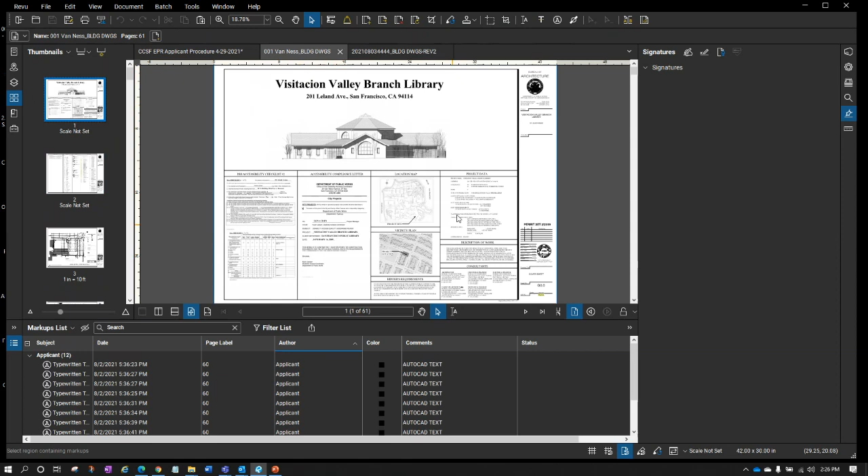So when I look at my sheet here, a couple things pop out at me right away. Number one, you can see at the bottom there's already a whole bunch of markups here - we're going to get rid of those. It's important that we have blank areas in place for the stamps; we'll talk about that. We want, if I look at my proper set of drawings, nice labels for our pages, and we want bookmarks identified for our pages. And of course with layers, we don't want to see any layers, and we don't want to see any markups at the bottom. So all of this we're going to go through step by step, and we're really going to start to get into this now.

One last thing I want to talk about, because this is always a common question we get, has to do with the versions of Bluebeam - the licensed versus unlicensed versions. So before I even get into all these procedural components we identify in the table of contents for the preparation of documents, I want to point out one more appendix - Appendix 2, right here at the bottom. In Appendix 2, we include information about the different versions of Bluebeam and how they're used. Let's cover that first, because it's a really big, important topic a lot of people will ask about.

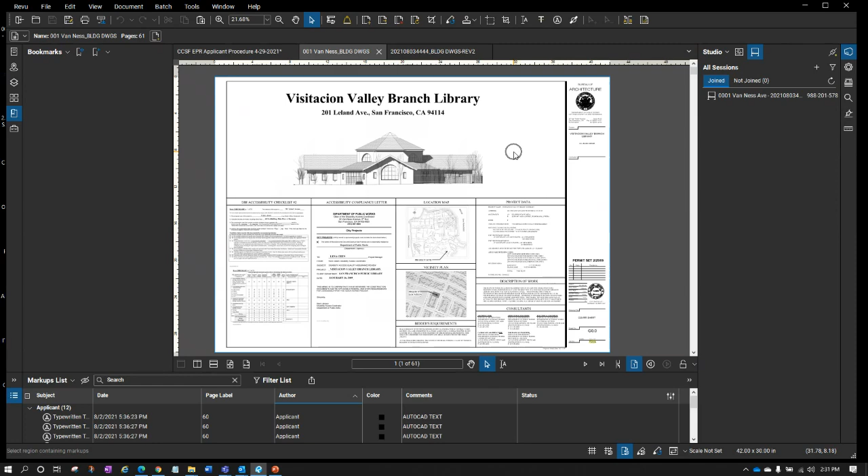What's important is that that space is in the same location on every page. So if I come back to my drawing set here, I see I have my blank stamp area, the 8.5 by 11 blank stamp area. And as I go through these pages, you can see over in this area I have an even bigger space than the 2.5 by 3 inch size required in the title block. Everything looks great, I have my blank area in place. So far, so good, let's continue.

I'm going to go back to the table of contents and focus on these. We've got our blank stamp area. As far as document sizes and volumes are concerned, we try to maintain a PDF size under 500 megabytes, just for ease of use. A lot of these document scale items you can read about on your own, they're pretty self-explanatory. I'm going to focus on some of the really big ones here.

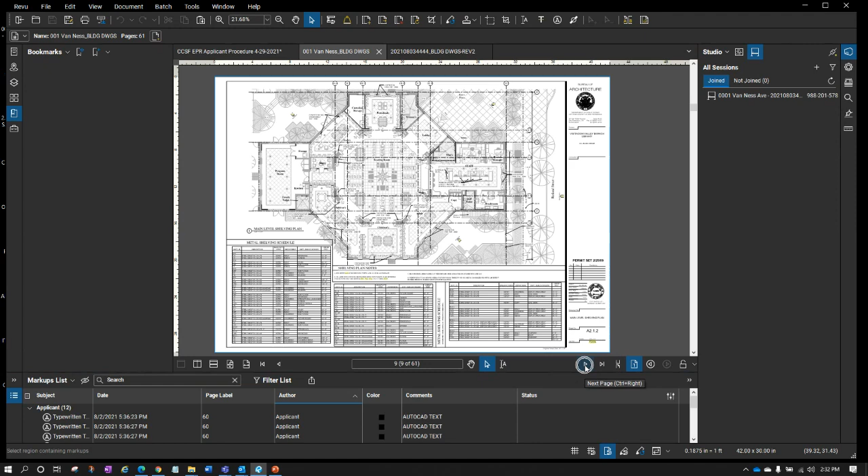This one, scan document prep, is really important, and it covers what happens if the documents are scanned at too high of a resolution. Let's talk about what I mean by that. As I scroll through these pages and click the advance page button, you'll see the pages are regenerating pretty quickly. There's not a big slowdown in any of these.

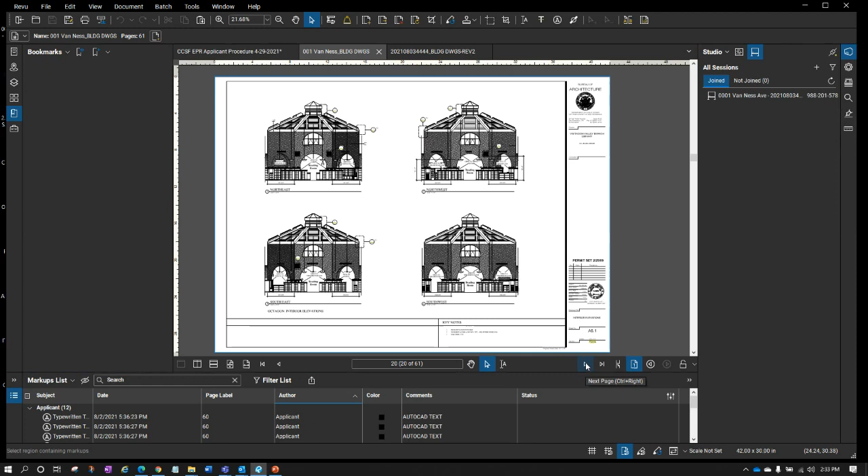When you're dealing with reference drawings or scanned drawings, there may be a question as to what resolution you should use when scanning your drawings. It's important to note what we're trying to avoid here: we're trying to avoid this regeneration process taking a minute, 2 minutes, 3 minutes, 5 minutes for the actual page to appear. As I go through these, you can see they go through pretty fast. It's only when you hit a reference page, some of these earlier pages that are hand drawn and scanned in, that in some cases it takes a long time.

So just note that when you're using reference pages, your scan DPI should be somewhere in the neighborhood of 90 to 100 DPI. A lot of people think, okay, I want to scan it at 600 because that's the best. But if that's the case, it's going to take 5 to 10 minutes for this page to even show up, and obviously that's going to cause issues for your drawing set. So just note that you want to be somewhere in the neighborhood of about 92, 95, 100 DPI for your scanned pages.

So let's keep going. Beyond the scanned pages, let's talk about page labels and bookmarks. You can see these page labels and bookmarks here. I'm going to talk about them sort of interchangeably, and what we're going for you can see in my completed set already.

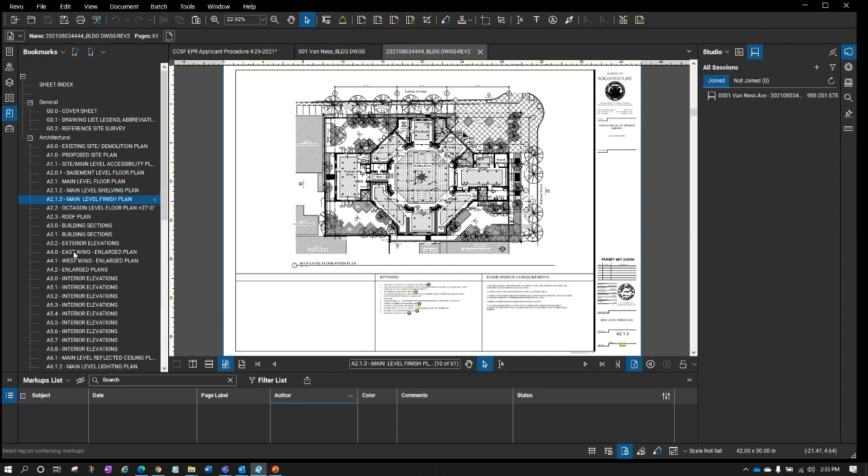What we're going for here is, in the bookmarks—again this button may not be in this location, it may be somewhere else—what we're looking to have is an actual sheet index duplicated in such a way that I can go through and see all the pages very easily.

So as I go through and start to look at my set that I'm prepping here, no bookmarks exist. With the page labels, let me come back here. What we're trying to focus on is the page labels which exist inside of the thumbnails.

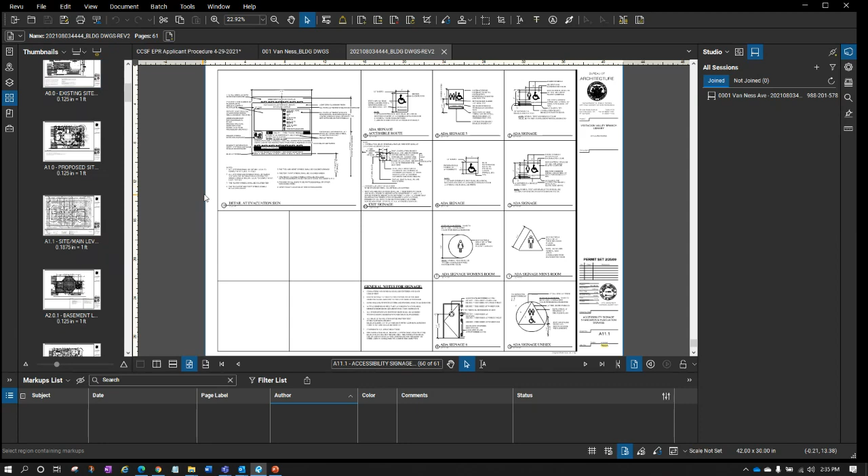Those of you who are Adobe users are probably pretty familiar with this. We want to see how these pages are not listed as page 5, 6, 7, 8 — these pages are actually listed with the correct page label, so the label of the page is actually applied. We're going to learn how to do that today.

When I come back to my set, you can see there's 5, there's 6, there's 7. As I scroll through this whole set, there's nothing particularly informative about this page label — we just know it happens to be page 60. We don't know if that's mechanical, architectural, or structural, just that it's page 60.

So talking about these things and looking at them from the perspective of a page label that gives you information versus one that doesn't, and a bookmark that navigates you through the drawing versus not having bookmarks at all — these two items, page labels and bookmarks, are really substantial.

So when we're talking about creating the bookmarks and creating the page labels here inside the thumbnails, this is a really important topic that needs to be included as we're going through our setup. So let's go ahead and do that.

Now I list these together because when I'm looking at my thumbnails and my bookmarks — here's my thumbnails, here's my bookmarks — you'll notice the creation of these happens up here with 'create page labels.' If I click on this, it gives me information asking me to select a page region and then apply it to a page range.

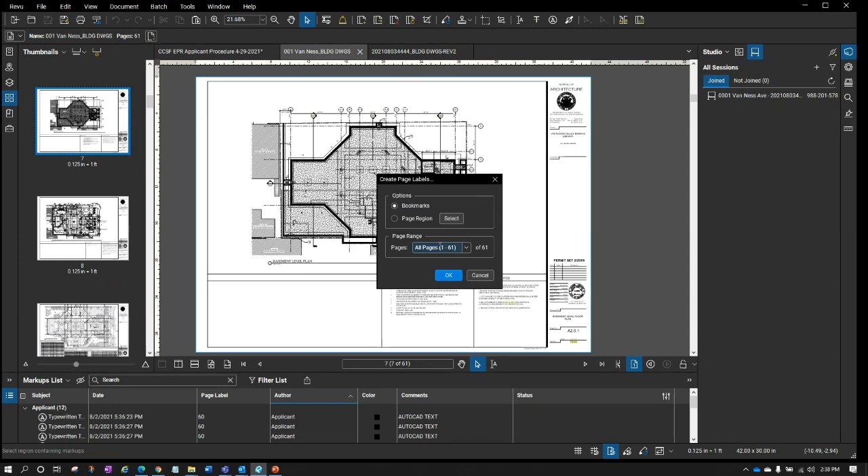So really, all we have to do is get one of them done correctly, and once one of them is done correctly, the other will follow automatically from that. So let's talk about this process of finding a page region.

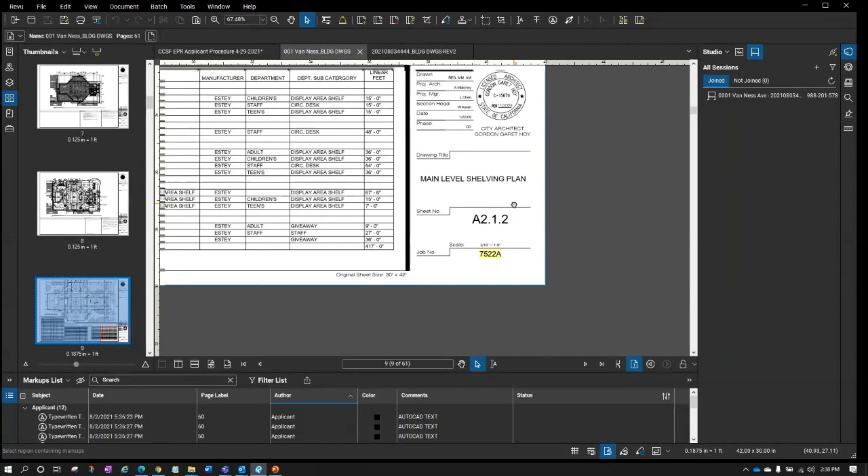I'm going to zoom in here to my bottom corner of my title block. I want to talk about one thing that's really important when it comes to the setup of your drawings — I already mentioned that in your title block you should have your project address and your information.

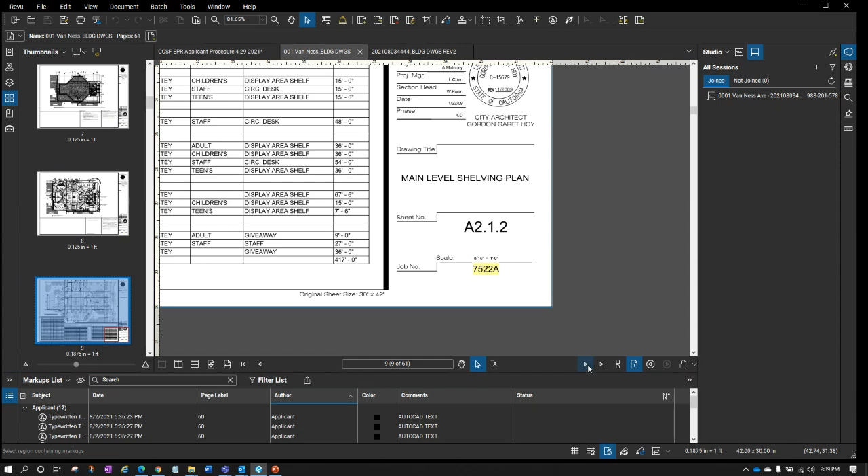One other thing that's really important when creating a set of documents is consistency, and what I mean by that is twofold. First, consistency in the naming — as I scroll through these pages, you'll see it doesn't switch from A3.0 to A3-0 or -1. We're not switching around between the naming structure or numbering structure. So that's number one when it comes to consistency.

And number two is that it's in the exact same location every time. So what we're going to do here is start by creating our thumbnails.

We're going to do those first and then use those to create our bookmarks. So when creating our thumbnails, we're going to be looking at a page region. We'll select that region, and every single time we'll look in that same location and hopefully find this page number.

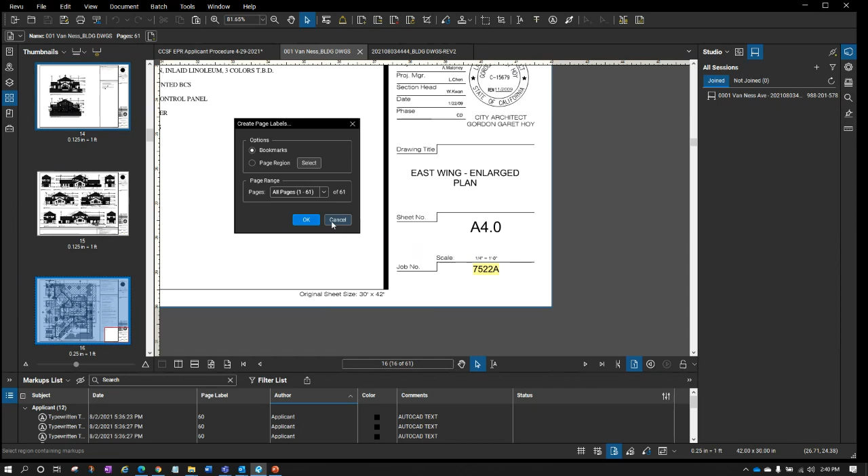Same thing with the title of the drawing. We're going to look in this region right here, and on every single page we'll be looking in this same region to find our page number.

What can happen in some instances is if you're inconsistent in your title block, if your subcontractors are using different title blocks. For example, here everything is the same as all the other pages, but when I come to this page, maybe we switch this out with a different trade, and they use their own title block. They put their number in a different location versus this number, and they put their title in a different location versus this title.

So when I create my labels and look in my range, it's going to work great for all of the pages that are consistent, and it's not going to work for the page that's inconsistent. So when you're putting your title blocks together, a couple things to note: consistency in the numbering and naming of the documents, and consistency in the title block and the location of the information.

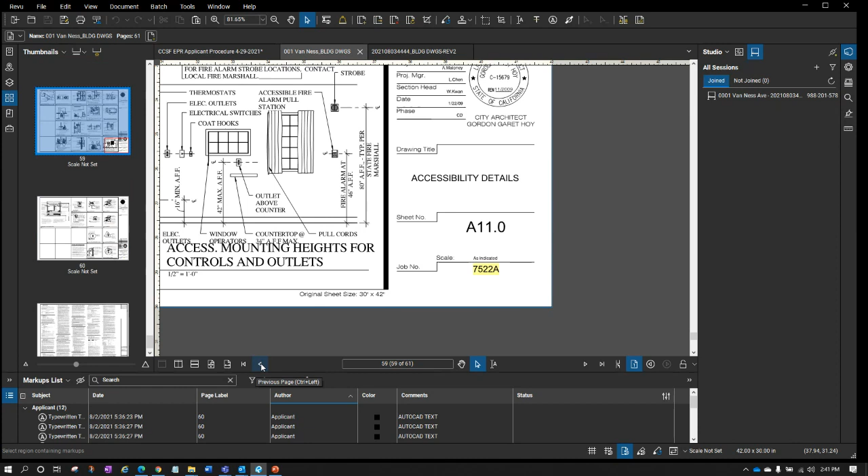So let's come back. Actually, we'll go to this one. Looks good. And I'm going to go ahead and create my page labels now. I'll show you how to do that.

So again, I'm coming up to create, I'm coming to page region, and I'm selecting a region that's going to identify first the number. Notice when I make this, I make it kind of big, and the reason is in case there's any little bit of shifting from side to side, or the number is really big and goes all the way over to the end, I want to make sure I pick it up. So I'll go ahead and select that region, which is this number structure.

After that, once I get up here, I'm going to put a space, a hyphen, and then a space. This space is really important that you add in, because you're going to find out later why. Now I've got my number, and now I'm going to add in my name.

So I click add, and again I'm selecting another region, kind of making a big region around here, maybe not quite there, right around there. And that's going to be my second region, and anything that Bluebeam finds inside of that, hopefully this name on every page, it's going to add.

So you can see now you're starting to understand why it's so important to have consistency in your title block. If these are all over the place, then it's going to be incredibly hard to create our page labels here for our thumbnails.

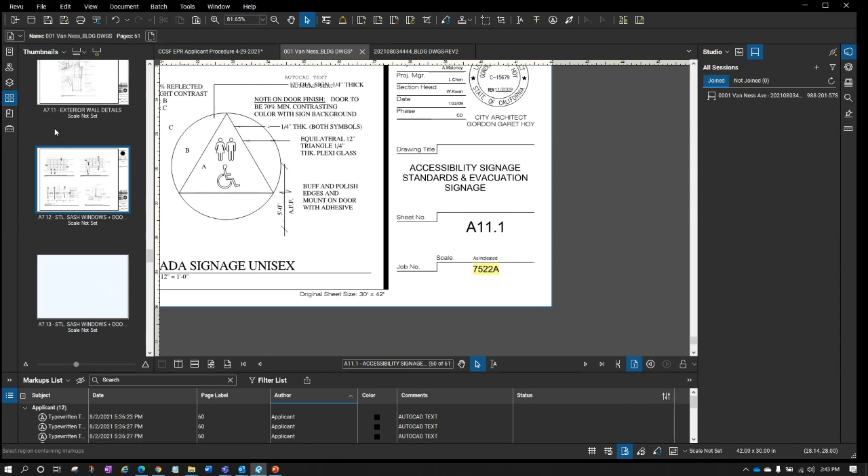So you can see in some cases, maybe it has a little bit of a problem. For some reason, it didn't pick up that A5.5. I would need to double click and come in here and do a quick fix. So you see I'm still maintaining that structure as I create it.

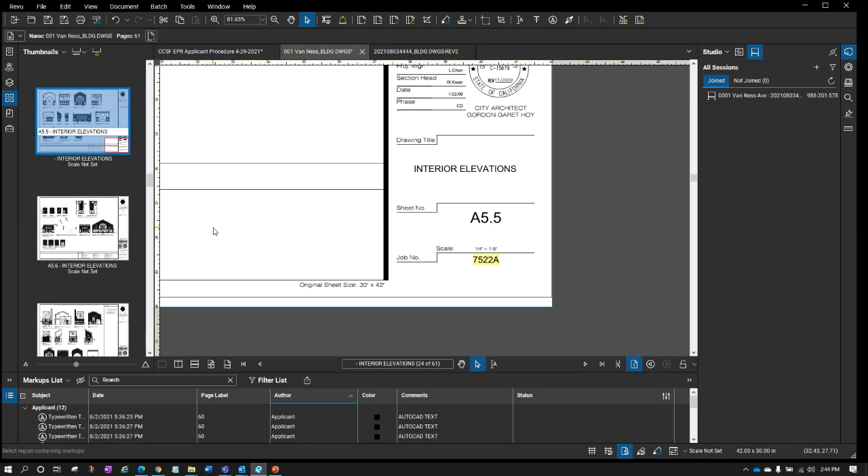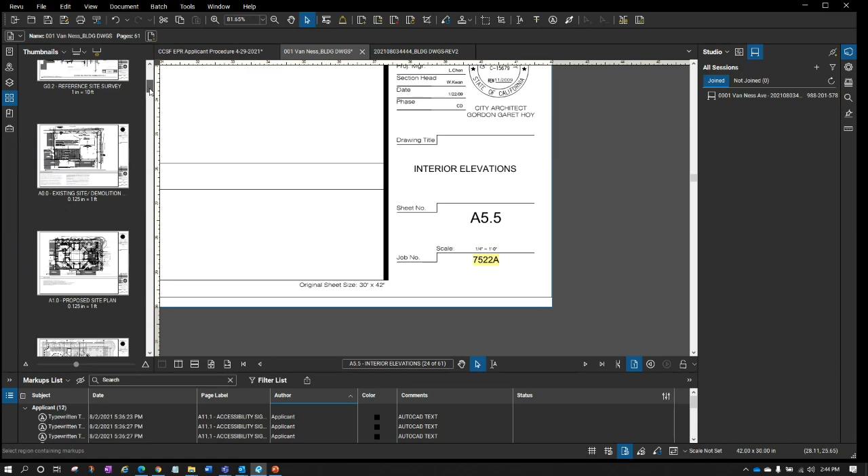As I scroll through, I can see these are really starting to look good. All of my names and numbers, my sheet numbers, are all really consistent as I come through. On my first page even, that one looks good. Now let's come down to our final page.

Remember this one with the inconsistent title block. You can see this one is really pretty messed up, but if I give myself a little more room, I'll click this. You can see it picked up the name okay, and it picked up a bunch of other stuff, but it did not pick up that S101. I'll add that in, add a space, and put that information in.

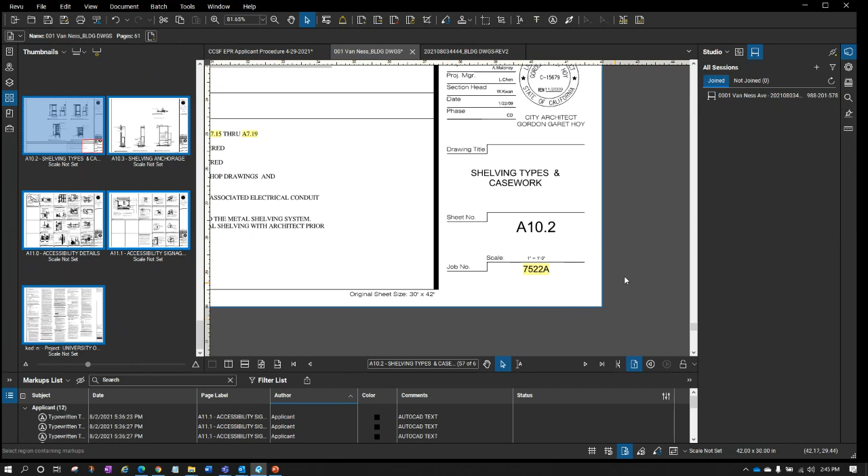If I wanted to cancel that - if there was a grouping of, let's say, 10 pages, I could select those 10 pages using the shift key, and then run this a second time. If I run it a second time with pages selected, it picks up those selected pages and creates that information for that selected set of pages. I'll show you with this one page, just so you can see one more time how to do the page labels.

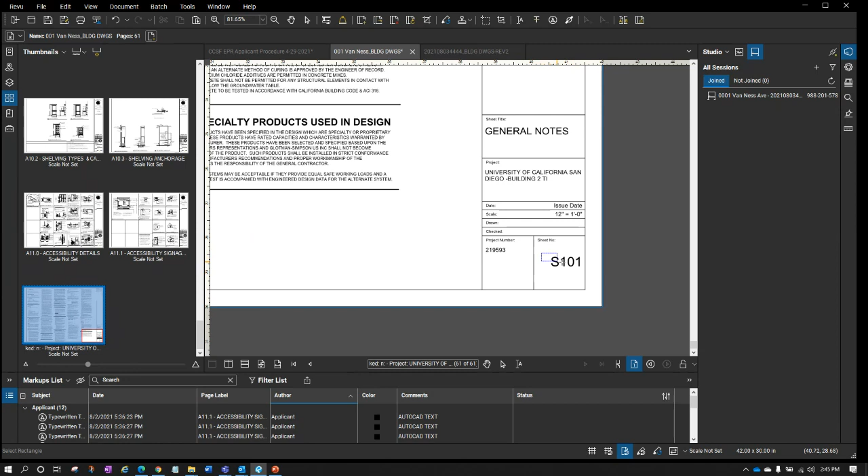Again, I'm clicking create page labels. I'm selecting my page region right here. I'm choosing first the sheet number. You can see I'm putting a space hyphen space, and I'm adding down here the name.

With this one I can get really close - there's only one page. Adding that information in, I hit OK, and then apply it to whatever number of pages I want, whether it's a selected number, all the pages, or in this case just the current page. So when I make those two region selections and apply it and hit OK, it picks up and applies that information to that page.

Like I said before, we've created one and now we're going to create the other based upon it. I've gone and created my thumbnails and cycled through, and those look really good. Now for the creation of my bookmarks, I don't need to do anything fancy. I need to hit create bookmarks right here, and when I click create bookmarks, I don't need to make my regions anymore.

I don't need to select anything. All I need to do is choose my page labels because I've already made those and those are perfect. So I just choose my page labels to create my bookmarks. I'm going to do all the pages, hit OK, and you see there's my bookmarks.

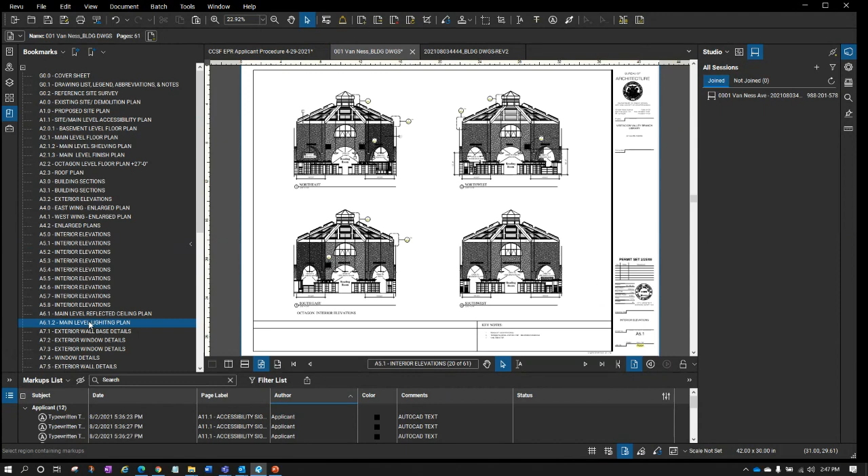Now I can easily cycle through all my pages. I know which pages are architectural, I know which pages are structural, I know I have this information, I know the general pages - I know all of that.

But one last thing we want to do after we create our bookmarks is nest those bookmarks. A lot of times users will have the bookmarks and page labels created for them but they'll miss this step. So this is an important step. When we're working with bookmarks here in our drawing, we want to nest them.

And what that means is we want to apply the trades specific to those specific drawings - I'll come in and show you here. So in this case, we have a general trade, we have an architectural trade, and we have a structural trade down here at the bottom.

So remember, I'm in the bookmarks, and by right clicking I'm going to add a new bookmark - see that little bookmark there? I'm going to be adding it before this one, so on top of this one essentially. So I click add before. For the sake of time, I'll just put a G instead of typing in the word general.

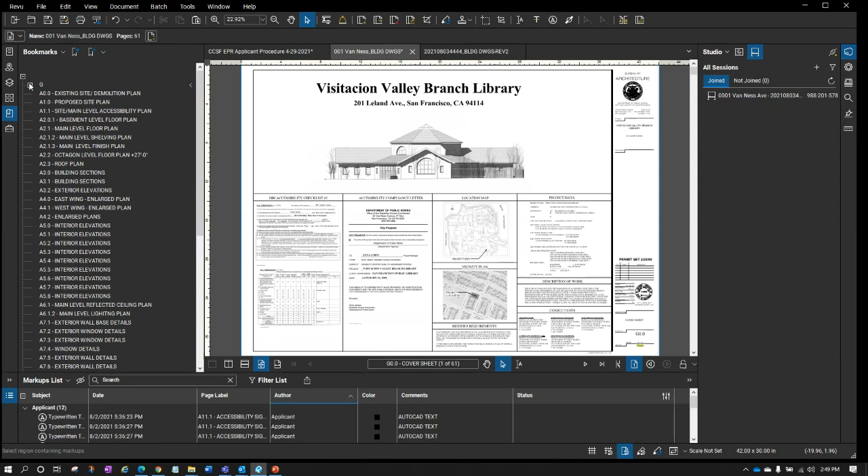I want to move it just a bit over. So you see what it does is it creates a little folder structure now that nests this up inside of here. I'll do it one more time so you can see it. I come to the first page of what it is, right click, add before, and type out the trade. So in this case, architectural.

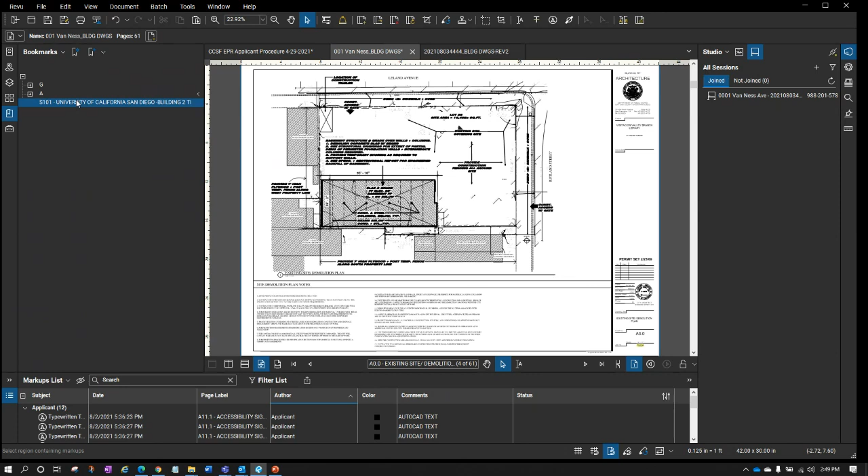Once I've done that, I'll go and select all the sheets that are associated with it. Then I'll come back up and drag up just slightly and over just slightly to place those inside of that nesting. Now you can see I can really start to roll this up. I've got one more trade left. I'll do that quickly. Click on the first page, add before, type in your trade, then come back, drag it up and over. So there you go. You see now we have our nested set.

Our bookmarks are in place. We have just a few more items to check off of our list here going through this procedure. After bookmarks, we want to check a few more things, specifically layers and then hyperlinks, and then we'll flatten our document. So let's talk about those last three.

So here, what we're going to do is we're going to go ahead and remove the layers. A lot of times when you're using AutoCAD or Revit, it's going to include all of the layers that are associated with the drawing. It's going to include those in, and the problem with that is it gives you the ability to turn those off. So what we don't want to happen is we don't want our reviewers to accidentally turn off half of our drawing because they accidentally clicked on one of the layers.

So what we're going to do is come to the layers, and if there are a whole bunch of them, you can select all of them, right click and select delete. We're not deleting any of the content, we're not deleting what's on the page or any writing on the page. We're only deleting the layer itself. So we make sure we leave these unchecked and just select delete. We're deleting the layer itself.

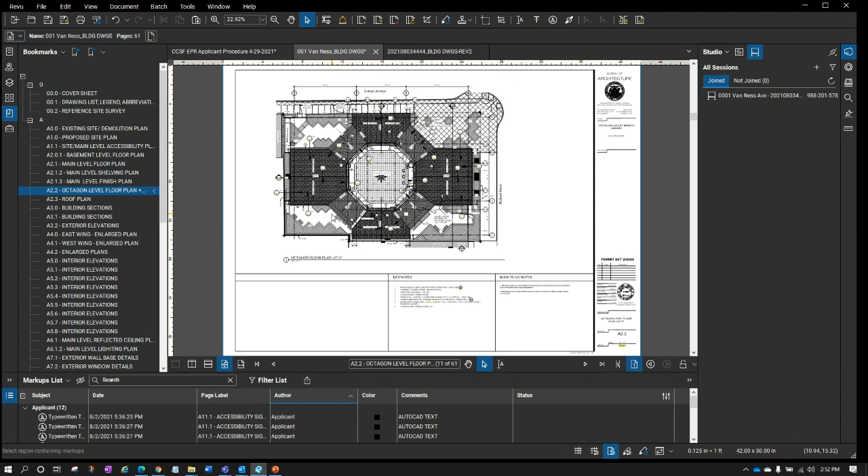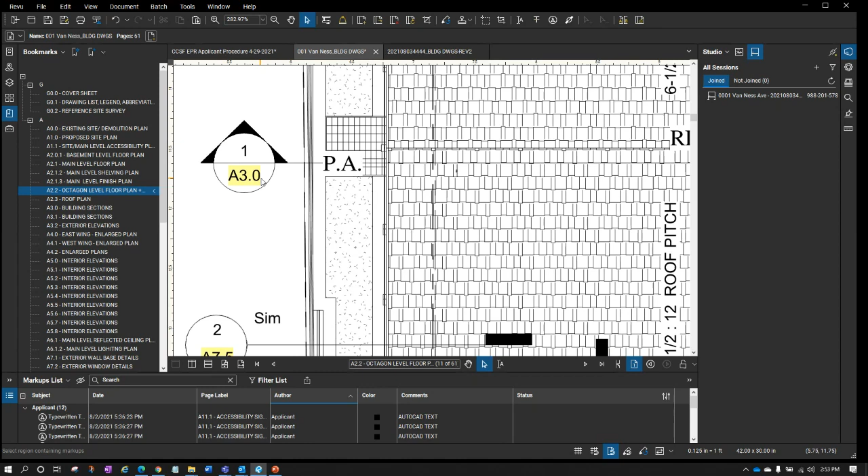So before I make them, let me show you what they are and what they do. As I come in and look at this floor plan for this building and start to zoom in, you can see there's some section cuts, some details, elevations, a bunch of cuts here, and you can see they have a little yellow next to them. When I zoom in, notice what happens to my mouse, see how it changes into like a little finger as I get closer to it. That indicates that there's a hyperlink.

So when I click on this, it will take me to that section. And if inside of that section there's a detail call out, I can click again and it will take me to that detail call out. So you can see here, I can maneuver around the drawing pretty quickly.

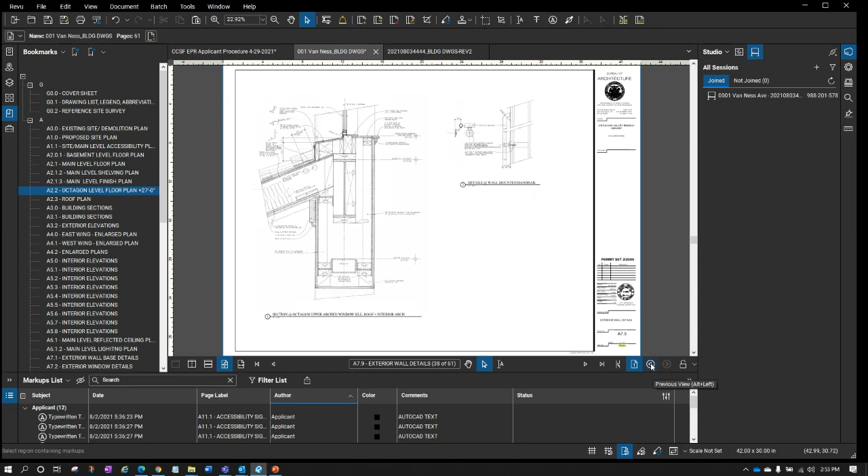There's also a back button, kind of a previous view button, and what that will do is take you back to where you started. So you can move your way around, go to your pages, take a look, go back, go to a different page, take a look, go back, and work your way through the entire set of drawings. Find some of the different section cuts, and when you need to look at your detail, you click and it takes you right to that detail.

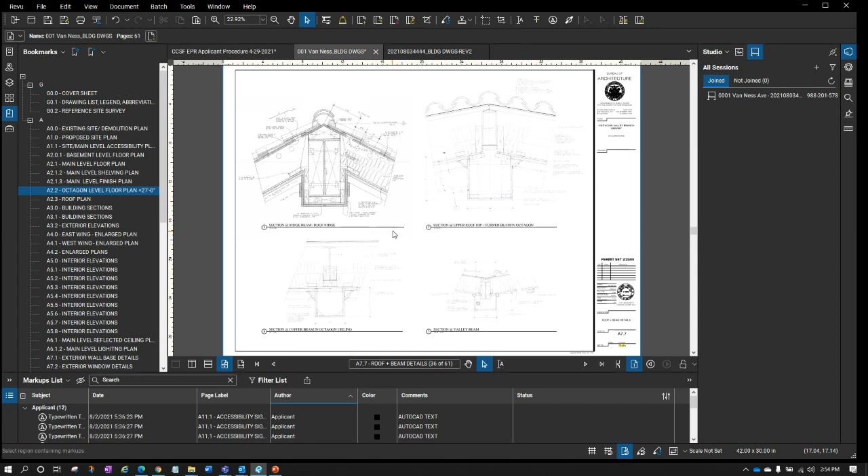So from the perspective of a review, remember what our ultimate goal is here. Our ultimate goal as applicants is to get our review done quickly. The easier it is for a reviewer to navigate your drawing, to find that elevation or that detail they're looking for, the faster your review is going to happen. So think about our ultimate goal here, and that is a speedy review.

We're trying to make this whole process as efficient as we possibly can by formatting the documents in such a way that they will be reviewed even faster than previously.

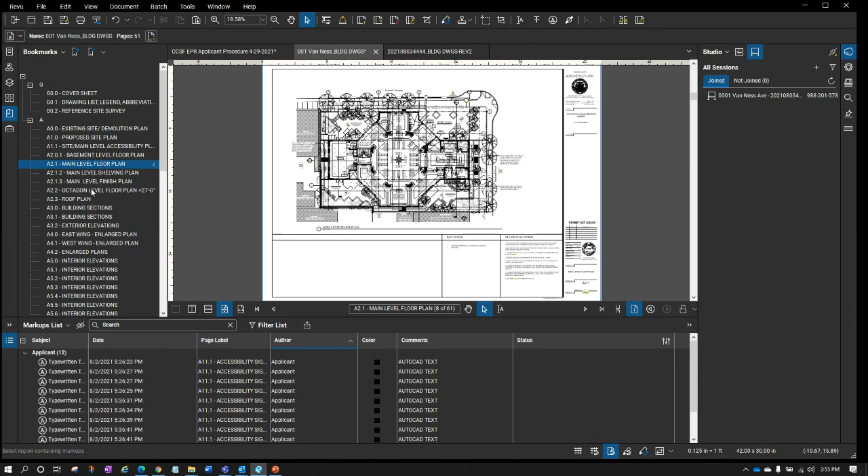So I'm going to go ahead and talk about the last step here in our procedure. Let me come back to our table of contents. This is a really important one, just one more thing: flattening the document. We've created our hyperlinks, we've removed our layers, and we need to flatten the document.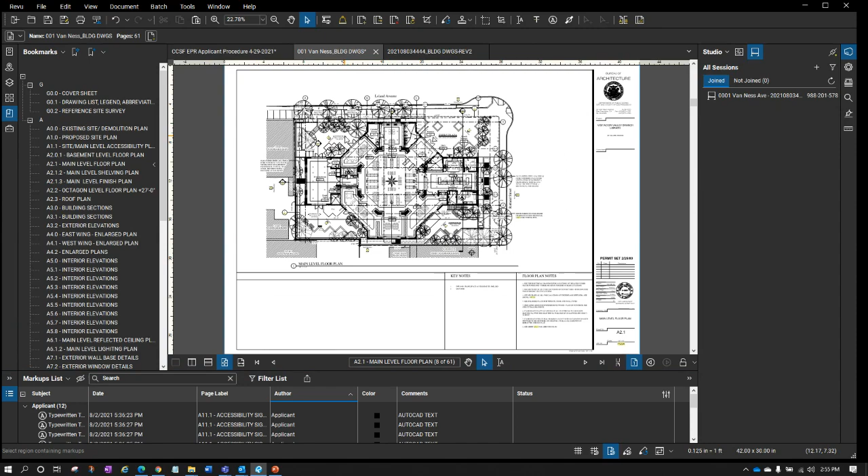Oh, sorry, I apologize, I need to show you how to do hyperlinks. Let me show you how to do that. So let's go through how to create those hyperlinks, how to get to the point where these are very easily set up. As I mentioned before, this requires the extreme version of Bluebeam.

In some cases, you may come to where I'm going, down to batch, link, and you may not even see link as a choice. It may not even be an option for you. If that's the case, just note what version of Bluebeam you have. If I come over here to About, I can see that I have the extreme version.

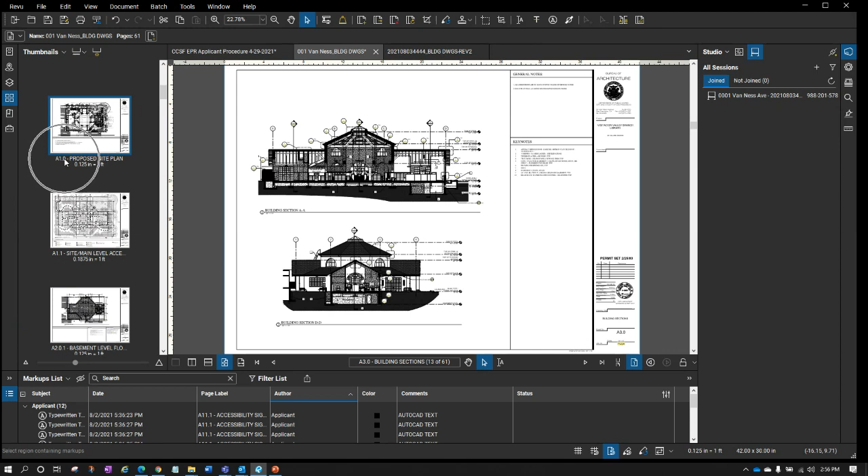This is all based upon my thumbnails. Back when I was talking about creating our bookmarks and thumbnails, I really said the thumbnails are really important, and that space there was really important. So let's show how this applies.

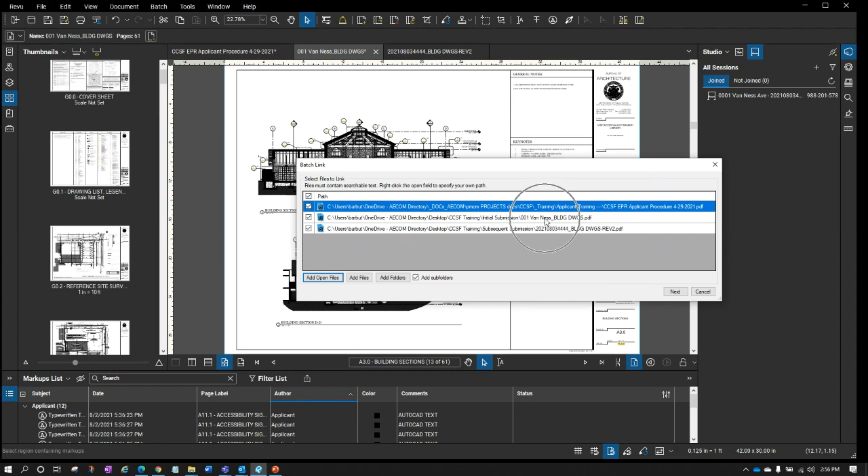I'm going to come to batch, to link, and then to new. When I do, it's going to ask me to add the open files, basically to pick which file I want to focus on. Here I'm focused on my drawing set, so I'll just uncheck the other two.

When I hit next, it's going to ask me to go through my page labels, the ones we're looking at right here. That's why these are so important. Based upon my page labels, it's going to start scanning them, reading from left to right. So in my settings, it'll go from the beginning and wait until it gets to a space. That's why I said it was really important to add a space right there. When it gets to that space, it's going to determine its search term.

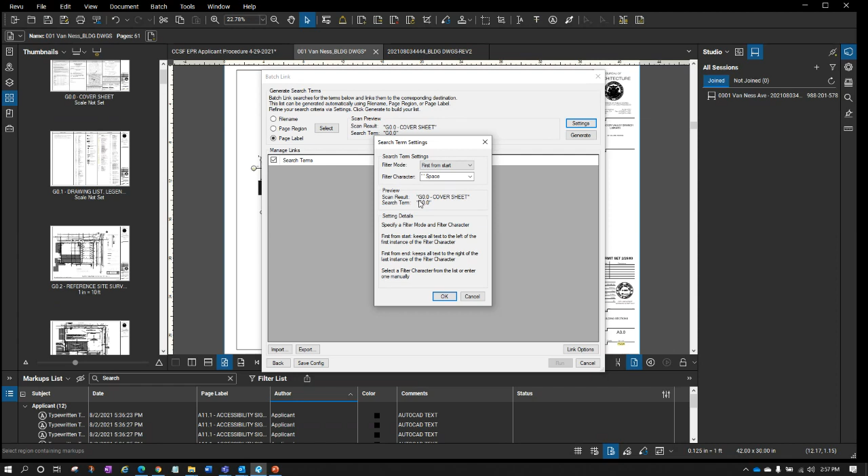So I hit OK and I hit generate, and you see it went through all these page labels, searched until it found a space, and generated its term, which coincides with these callouts here, these page numbers. So now when we're on one of these callouts asking for a section, say it tells you it's going to send you to where that section is, A73, it'll just send you to page 32, which is the page that section lives on. So the way this is done again is you go to batch, then link, then new.

And then from here, from the page labels, we're setting it to go till it hits a space. Then we're clicking generate, and all of that information you see generates all of these.

One last thing we can do, you notice when you look at these, some of these are a little bit of a yellow color. If you want, you can go to link options here and set a little highlight—my appearance property highlight of yellow is kind of nice. That way it shows you exactly where these are all over the sheets. So I do all that and click run. When I click run, it takes you through the document and creates all of these hyperlinks for you within this document.

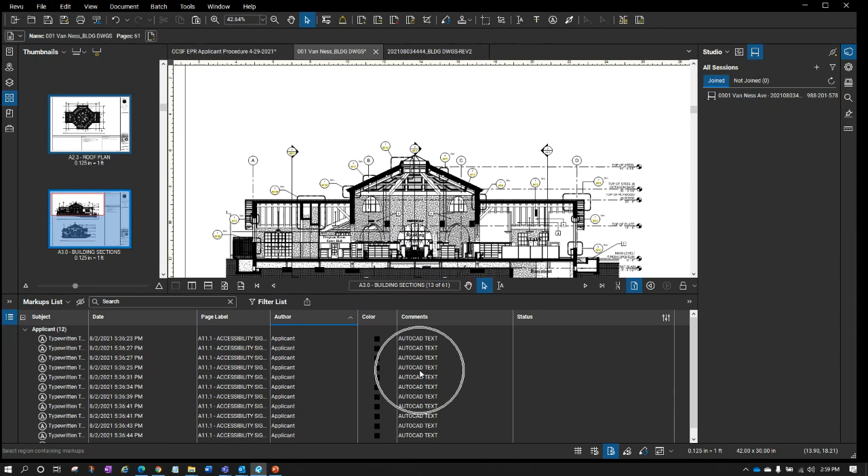So we've covered hyperlinks. Now let's talk about the very last step, which is very simple: flattening the document. By flattening, we're making sure that this markups list isn't full of what we call clutter. A lot of times, especially when using AutoCAD, AutoCAD adds a whole bunch of SHX text onto your documents.

And what it's going to do is add that information, and it's going to make it really hard for the reviewer to add their comments, because their comments get mixed in with, in some cases, hundreds and hundreds of these little markup things. So we don't want to just delete it all, because that would delete text on the document itself. What we want to do is flatten the document down so that we have a very clean markups list at the bottom.

So I'll come to document over here, and come down to flatten. Some of you may have a button for flatten—you see I have a button for it right there, but I'll choose flatten here. And I don't have to do anything special. All I have to do is come in, click flatten, uncheck that unflatten ability if it's possibly checked, and just click flatten.

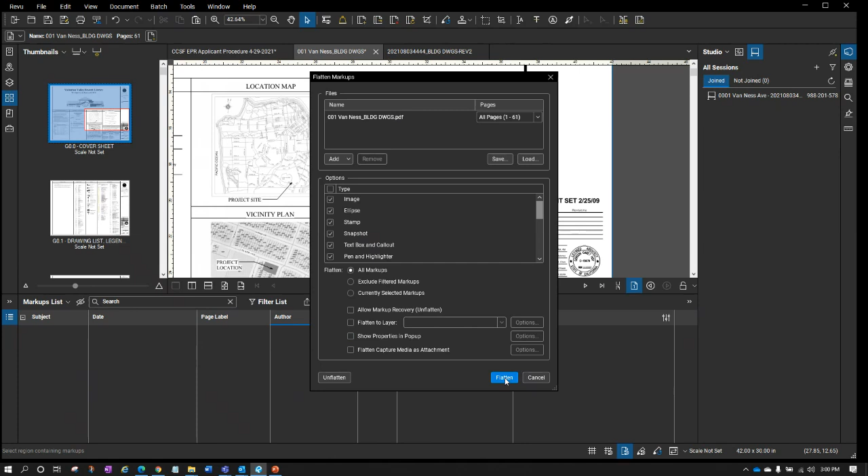And when you do that, again, not many changes need to be made—just basically click the button and click flatten. What it will do is remove all of the markups down in this list and permanently apply them to the document.

So we've gone through all of the steps for the document preparation. There's one last important step as we're preparing the files for submittals, and that is adding this backcheck page.

Before I talk about that, I want to mention, when it comes to your other supporting documents and specifications, we don't have to go through all of the steps we just did for the main documents, but a couple of important things: we do want the layers removed so nothing accidentally gets turned off, we want the document flattened so there aren't a thousand markups in the markups list to sift through, and in some cases we want some bookmarks added. It's dependent upon the document for how you actually set it up.

So let's talk about the last step before submitting, and that is adding this backcheck page. You may have noticed when going through submitting your information, in a couple of spots it's asking about adding in the backcheck page. If I go back and look through here, it's talking about adding that backcheck page to your plans—one of the big topics that must be done.

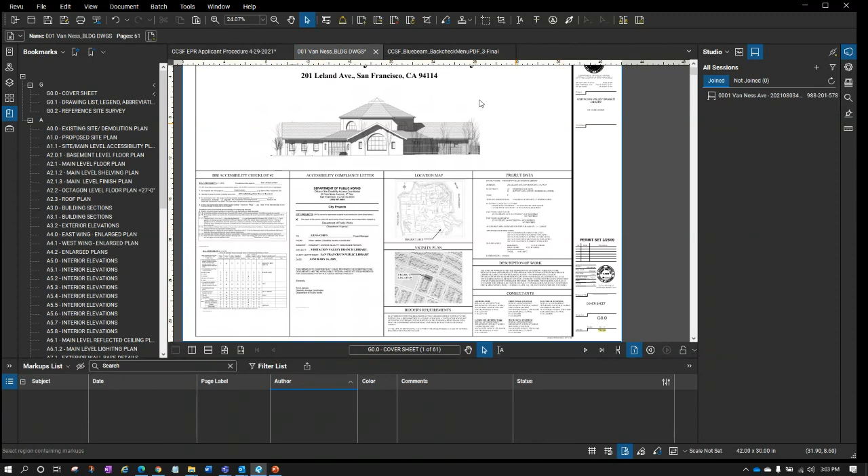So it's not particularly difficult. Probably most of you have added pages to PDFs before. I'll call up the document right here, and then we're going to insert a page from the document.

Within Bluebeam, you can add the open files, find the one that's yours. Here it is, there's the back check menu page. I don't want the procedure added, so I'll remove that.

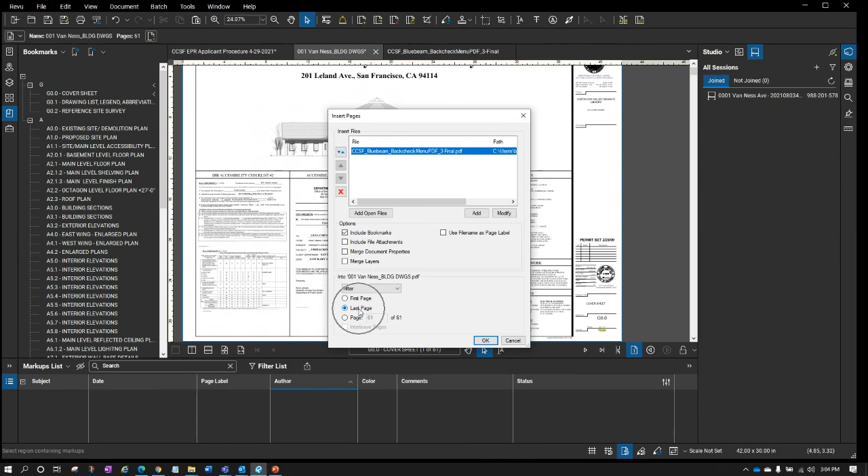I'm just picking this single page that I have downloaded and opened, and I'm going to add it after the last page of my document, so it'll just be the new last page. I select the document and insert that page as the last page. I click OK, and you can see this page has been added at the end of my plan.

So now if I come in here and look at my set of drawings, you can see at the very end of my drawing set I have my page. That's the last step in the setup of the documents.

Now we've completed the setup and we're ready for submission for electronic plan review. Let's talk about that. I've created everything and everything looks great. What I would want to do is save this document, save all the naming and formatting I've done, save everything, and get it in the correct PDF shape with the last page, the back check page, added, everything ready to go.

Once I have that ready to go, I'm going to come back now and submit my files. So again, we're going back to sf.gov. One important thing to note here is the initial submittal that you submit is submitted through sf.gov. Your initial submittal comes to sf.gov.

So for building permit applications, for site permit applications, your first submittal involves creating your PDF following the rules I just covered, getting the upload file. Oh, it looks like it's 350 instead of, I think I said 500. So 350 is an even better size.

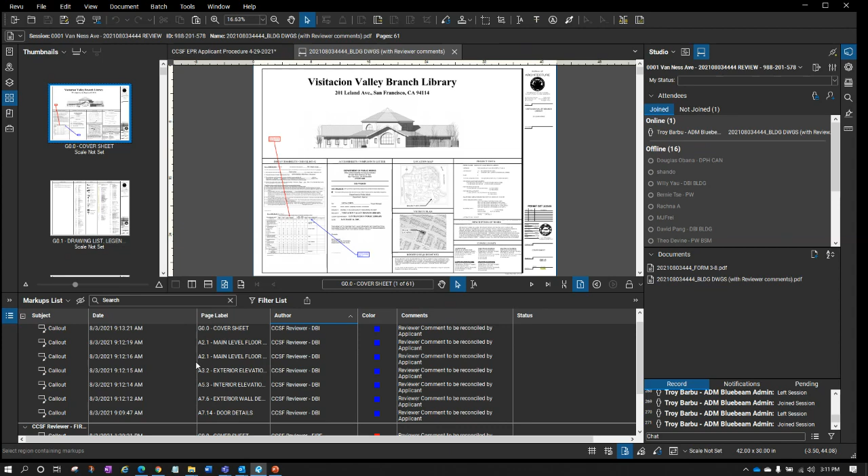You're going to start to see comments by the different reviewers. You can see I click on these and it'll start to tell me the person, whether they're a fire reviewer, whether they're a DBI reviewer. You'll start to see that information now. You're obviously going to see what page all of these comments are on because you did such a diligent job of setting up your page labels.

And basically what you're going to be doing now is picking up your comments, right? You're going to be responding to your comments. If there are comments, you're going to be creating your subsequent submission. You're going to be clouding any changes that you make in that subsequent submission. And eventually, after you've picked up and responded to all these comments, you will upload that subsequent submission directly into the Bluebeam Studio session.

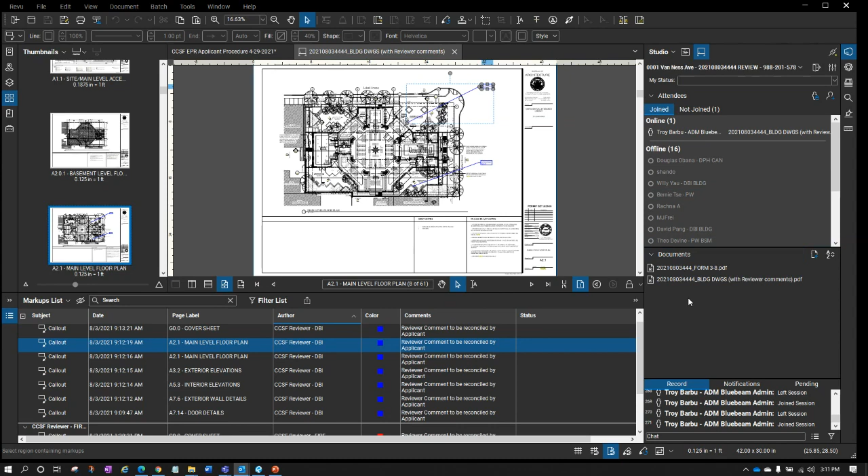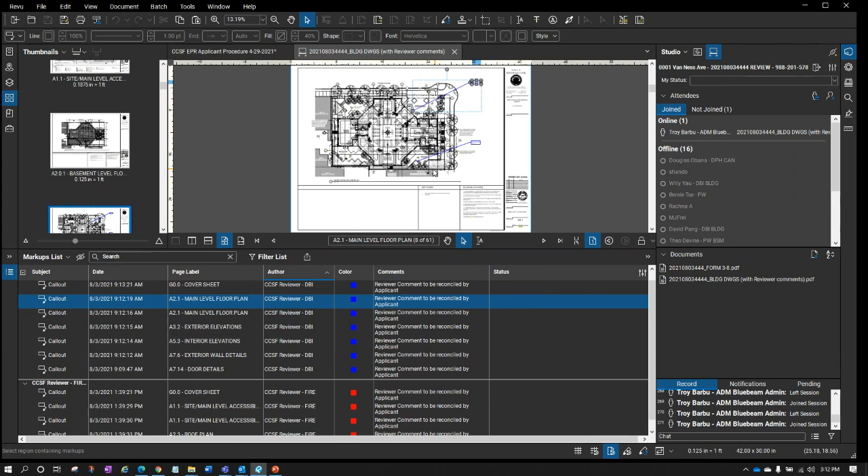So let's talk about the process of picking up comments here. You can see I'm going to start to organize this list down here. A lot of what's going to happen is going to happen inside of this markups list. The markups list that I have in place, you notice if I click on the comments, it cycles through them. Not really that easy to spot unless I zoom in a little bit, because once I zoom in now, when I click, you see it zooms me to that entire comment.

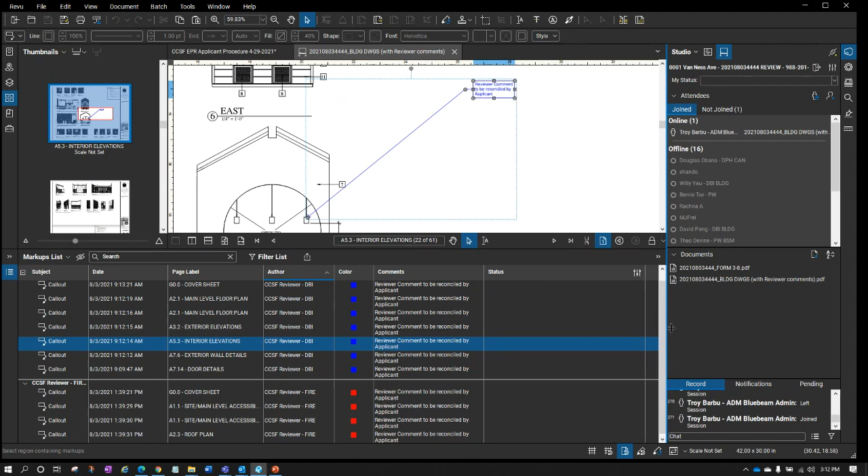So you can see I can really clearly see the comment and what it's pointing at, all that information. So as the applicant, what you're going to be doing in this case is you're going to be asked to start to respond to those reviewer comments. So the reviewer has made a comment here, and let's say that they're asking you to add in a little bit of information here. No problem.

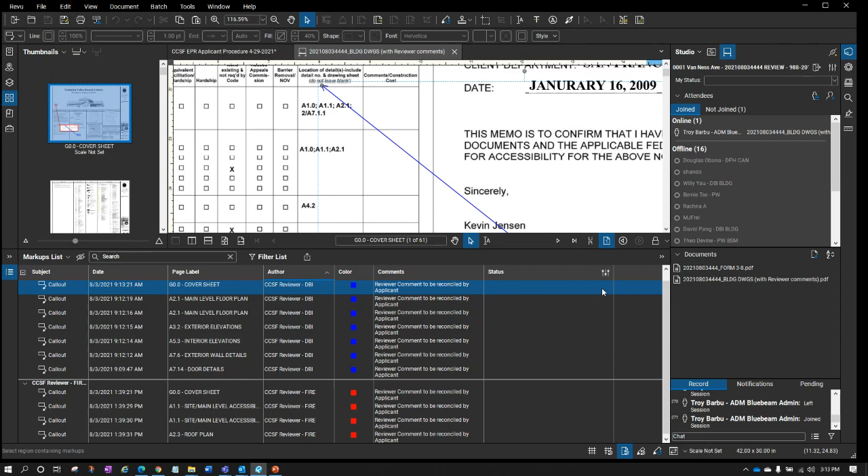What you're going to do is, again, you select the comment, and you notice when I select the comment, it highlights it right here, just like if I highlight it here, it selects it here. So the comment is essentially selected. You're going to come over here to the status menu and double click. And when you double click, you're going to be given some choices. So again, the way I did that was I clicked and it selected it, and then I went to this location and I double clicked.

That brings up a subsequent menu, a set status menu. I could also right click and set the status if I wanted to.

When I double click my applicant's response, I have two choices: either I'm going to incorporate it, which is probably going to be most of the time, or I'm not going to incorporate it. So you see here, when I incorporate it, you'll notice that it just changed color. So I have information to know what's going on here by looking at the color of these.

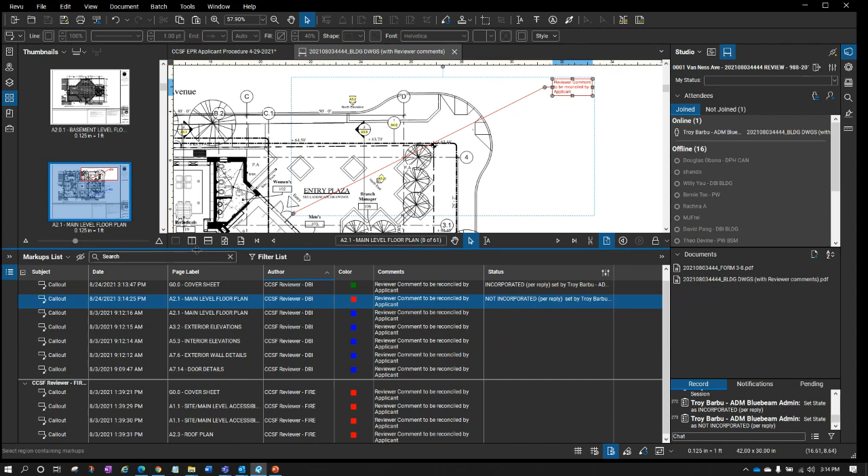Let's go to the next one. Maybe it's asking you to change this door. Let's say I have an issue with that. Maybe they want a single door here, or a larger door, but it's not required by code. So I'm going to try and see if I can not incorporate it, and then we'll talk about what we do with the reviewer to see what we can do to resolve this.

So in most cases, you're going to be incorporating it. What we'd like you to do as well, unless it's really, really obvious that they're asking you to fix a typo and you fix that typo, we want you to also add in a reply.

So what we mean by that is, let's say in this case they asked you to add an additional column or something like that. You might reply and say 'additional column added,' whatever, right? You really want to make it as easy for them to understand exactly where your correction has been made.

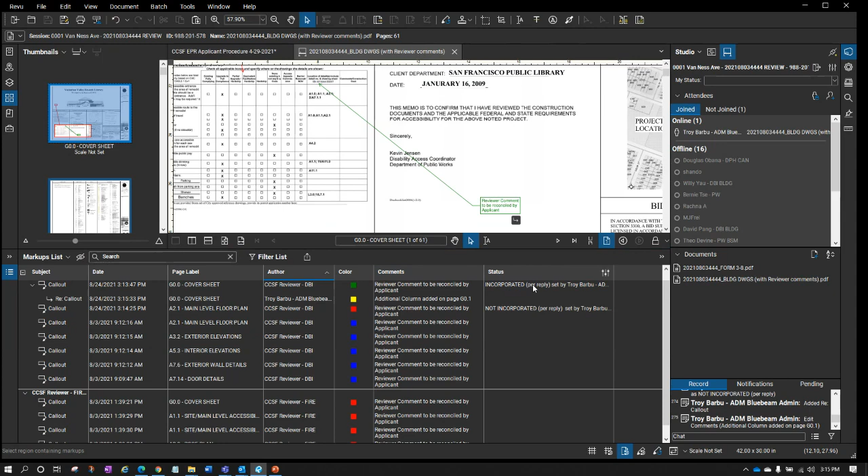Especially if there's any big changes, like let's say it goes to another page instead of page G0.0, you put it on page G0.1. You want them to be able, even if it's an incorporated comment, to find it as easily as possible.

So in addition to setting that incorporated status, you're also right-clicking and adding in a reply. Now certainly if you're not incorporating a comment, they ask you to put in a larger door.

Let's say they ask you to put in a 36-inch door, and then you can reply back and say you're not going to incorporate it. You can add in a reply and state that a 32-inch door is per code, whatever. So you get the idea here.

If there are reviewer comments that you want to respond to, you want to communicate back and forth with the reviewer, then you can use this system here down in the markups to do that.

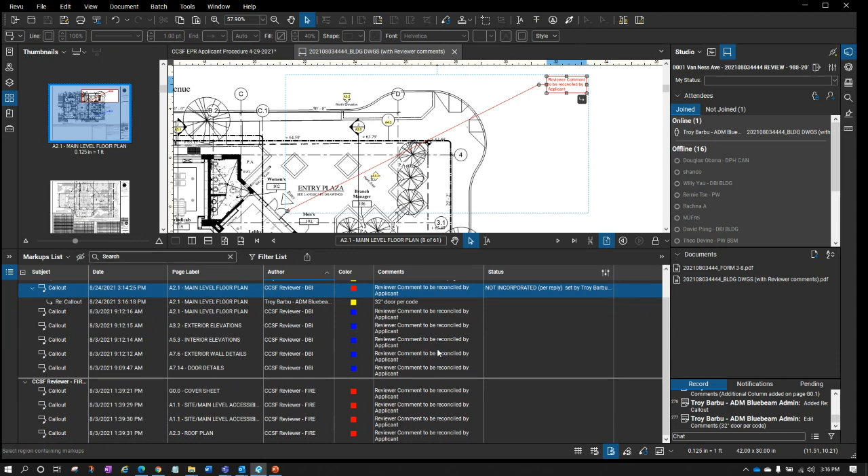Let me continue and show you a few more examples. Maybe a comment is made by the fire person. He wants you to add information here again in the checklist. Of course, you double click right here, you'd set the field to be incorporated. You could add in a reply.

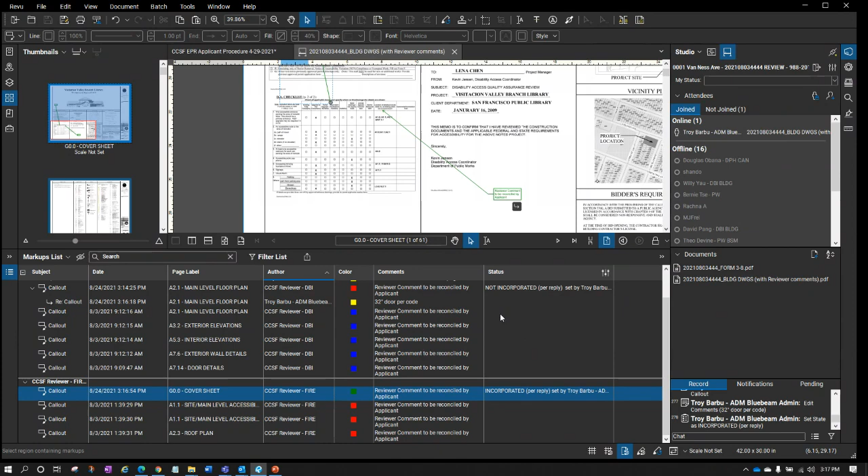Basically, the idea here is that you're going through and picking up all of the comments, right? All the comments have been made by the reviewers, and your job as the applicant is to come in, pick these up, and communicate back to the reviewer how it was fixed. So whether an additional detail has been added or some other information, you are creating your subsequent submission.

You're creating your next drawing set that you're going to submit. You want to cloud that change you've made, but you also want to indicate here where they can go find that change. So that's taking you through the process.

When we're down here making these status changes, just note a few things. One is, as you're working, you can start to sort this. You can see I sorted this by author just by clicking on this top. By sorting by author, you can organize your DBI reviewers versus your fire reviewers just by clicking the top tab right here.

I could sort by page, look at the individual pages where comments exist and work that way. Or I could sort by the status itself, or use the filter. Using the filter, I could filter all the ones that are incorporated, not incorporated, or open or closed when you come to the back check process.

You're basically able to filter out by individual authors. So if you wanted to only look at fire, let's say you're only responding to fire comments, you can filter out your list and only look at those.

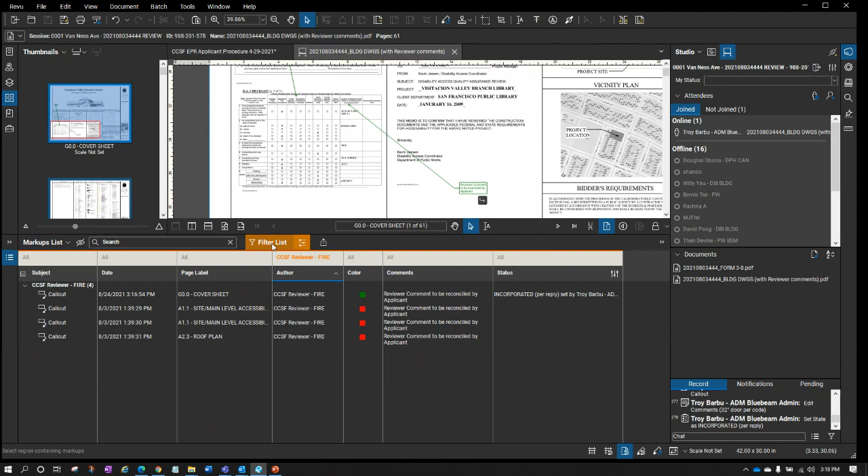Just note that you have some options when you're working here in Bluebeam, using the filter or using the sort, which is just clicking on the header.

Going through, creating your subsequent submission, clouding the revisions that you make in that subsequent submission, eventually what will happen is you will be creating revision 2, a rev 2.

Coming back to the procedure, coming back to the submission of documents, we just talked about the incorporation, the filtering, the applicant response, the reply. We've talked about all that. We're now talking about subsequent submittals.

Again, for those subsequent submittals, just note that in this case, we are submitting directly into the Bluebeam Studio session. So let's talk about that.

Let's see, I apologize if you guys are hearing all of the sirens outside. I live in the middle of downtown Los Angeles, so I apologize for that.

Anyways, let's get to the subsequent submittals. Obviously, what you're creating here is this revision 2 document, right? You have this rev 2, this subsequent submission, and you need to get it into this Bluebeam Studio session.

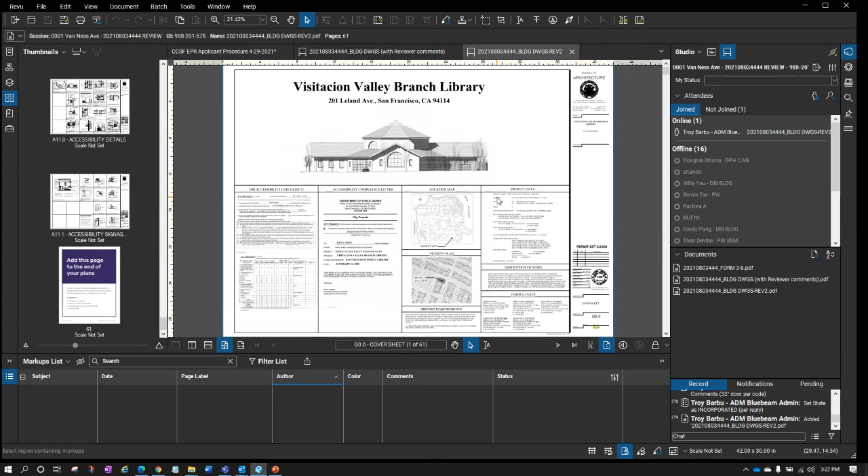So what I'll do now is take you through the back check process, and then we're going to move on to maybe some questions, and then we're going to talk about the Mac users as well.

We have created our original set of documents. We submitted those through sf.gov. Those got uploaded into a session. We got invited into this session and we joined in this session. Inside the session, we responded to those comments using that status menu.

Then, as part of our corrections of these comments, we created our Rev 2, our subsequent submission. We followed all of the procedural documents, including naming it correctly using the Rev 2, creating the bookmarks, the page labels, and all of the other information, flattening the document, removing the layers, adding that backcheck page. We uploaded that document directly into the Bluebeam Studio session. So the instructions on how to do that are right here, how to go in and upload directly.

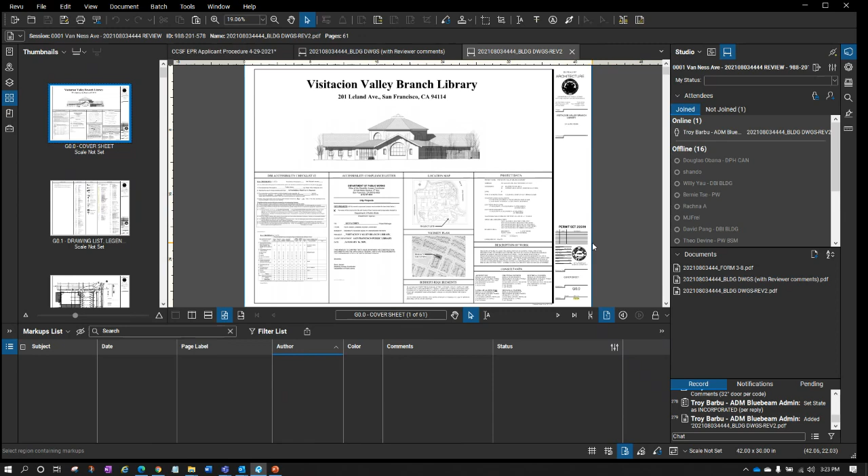Once we've done that, now I'm going to take you through the process that the reviewer will do, just so you have an understanding of what happens next here. So the reviewer is going to come in and see that the comments were incorporated, right?

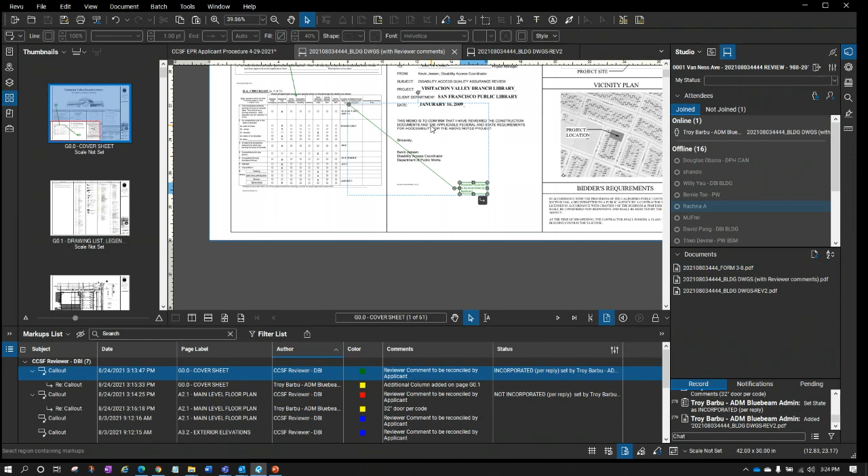When they come to their subsequent submission, they're going to check to make sure the comments have indeed been picked up. In most cases it's pretty cut and dry: they asked for a correction, you made that correction, you said you incorporated it, and as the back check reviewer, they're going to close your comment. That comment turns gray in your initial submission—it's now basically closed out. We don't have to worry about it anymore.

In another case, let's say you decided to challenge the reviewer—maybe there was a phone call or more information shared via email. If that's the case, I strongly suggest you use the reply to include all of that information, to make it as easy as possible for the reviewer to understand why you didn't comply with their request to make a correction.

But let's say there's still a problem with this particular one. What may happen is that this comment may be left open. And if it's left open, in some cases it's either going to stay open here, or it's going to make its way into the new drawing set.

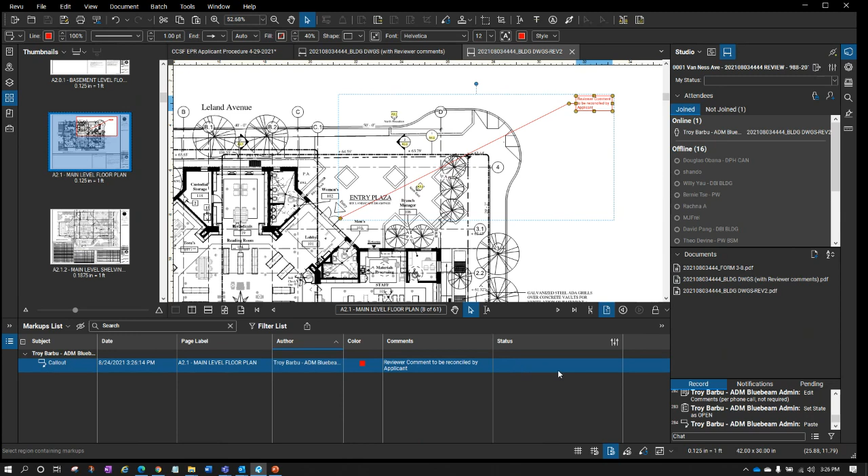In the new drawing set, it's going to be included and remain an active comment that you, as the applicant, will have to come back and respond to—either incorporate it or not incorporate it. Then you'll need to create a Rev 3, a subsequent submission, and submit it using the upload button as part of that session.

Going through this, you'll see that in most cases the comments will be closed out. Hopefully not too many will remain open, but this is where you can use your filter and look through the filtered list to find the open comments—this is where you can really get a better understanding of everything. Let me clear this to make it easier. There we go, now we can find our open comments.

The real goal here is obviously to get approval, so we're going to want to provide as much information as possible as we're responding to these comments.

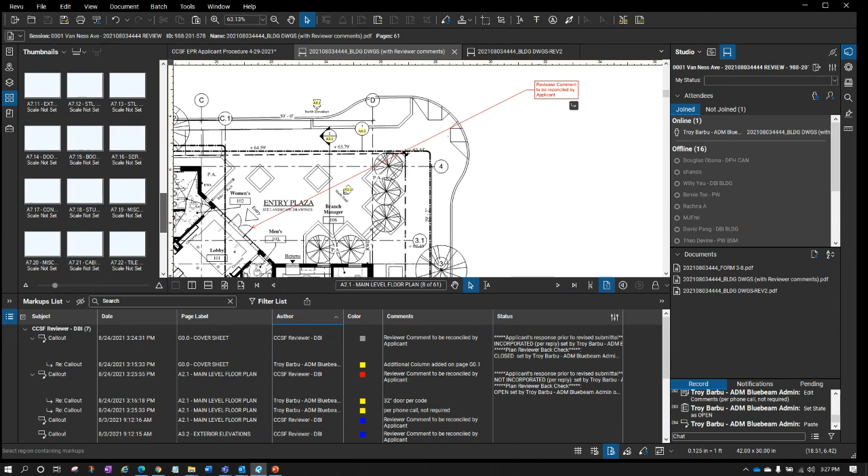When you get to that subsequent submission, you're doing the same thing: checking to make sure it includes the back check page, that it has its bookmarks, its thumbnails, and its layers and markups list empty. You're basically repeating that process until you get to the approval phase.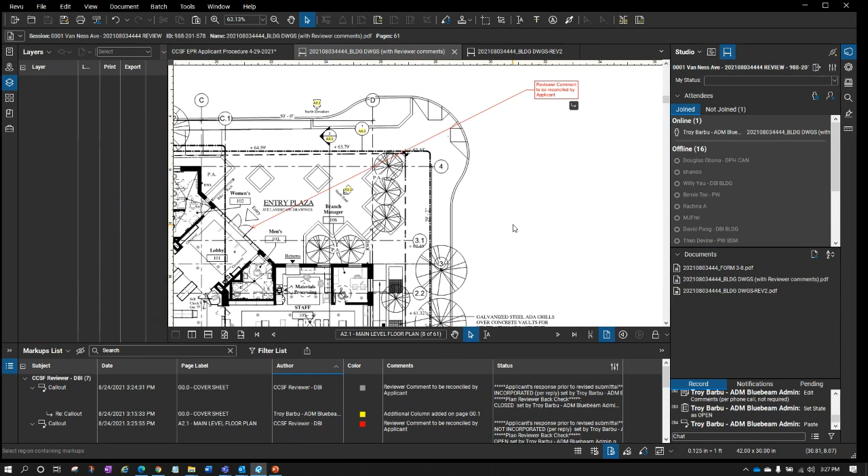In the approval phase, once the project's approved, the files will be taken out of the session and brought into the Bluebeam Studio project, which you guys don't have access to. A link to your approved, stamped files will then be sent to you, so you have that information all set.

Okay, Rebecca, let me ask you—hopefully you're still out there somewhere—do we want to go right into the Mac user procedure, or should we take some questions first and then talk about that? We have enough time to probably do both. Why don't we jump into questions and see if there are any.

I'm not seeing anything in the chat yet, though. Really? Wow. I know—it's because in the last session I made a note of all the questions that were asked, and I covered all of those in this presentation. So you're right, I don't see any either, which is very strange. We should see at least a few.

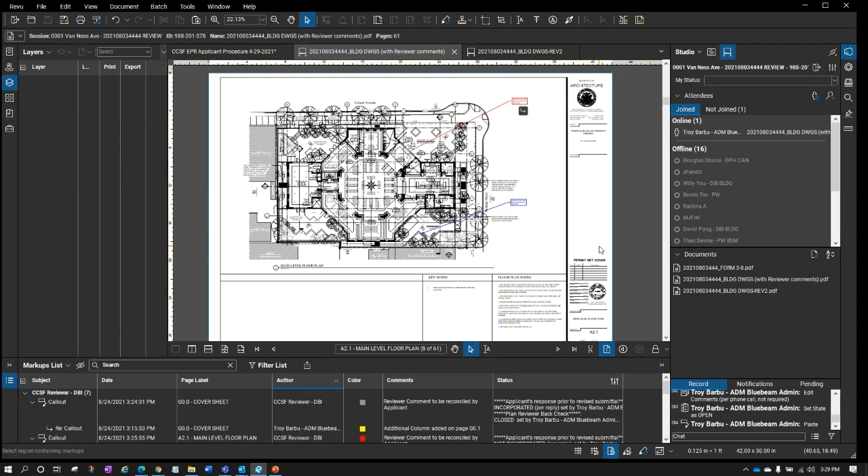We know that there are Mac users out there, and that Bluebeam has discontinued its support of the Mac environment as of a little over a year ago. This obviously makes life difficult for you, and we don't want that, so we've created an additional procedure.

Now, I know everyone's thinking, where do I find these procedures Troy keeps showing? Just to remember, go through electronic plan review resources. If I click on resources and scroll down, you can see some of this Mac user and other information provided for you.

Let's talk about this exhibit, which is exhibit K1, a guide for applicants who are unable to access Bluebeam. A couple things to note: obviously the ideal situation that will get the most expedient review is going to be to use Bluebeam.

There are other options, which Rebecca can talk about at the end, for non-Bluebeam users for one reason or another. But just note that using some of these other options may potentially lead to a slower review process versus using Bluebeam.

I'll take you through this exhibit, created specifically for Mac users. The idea is that the files here in the session, once they have their comments added, will be removed from the session, extracted, and emailed or sent to you.

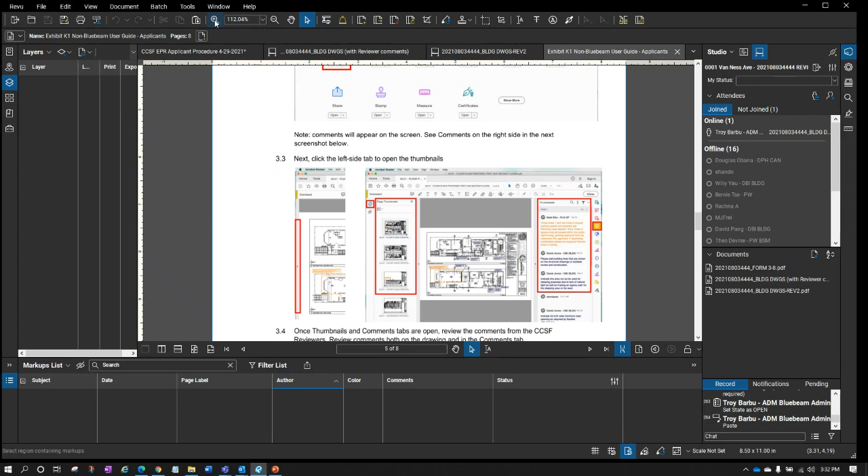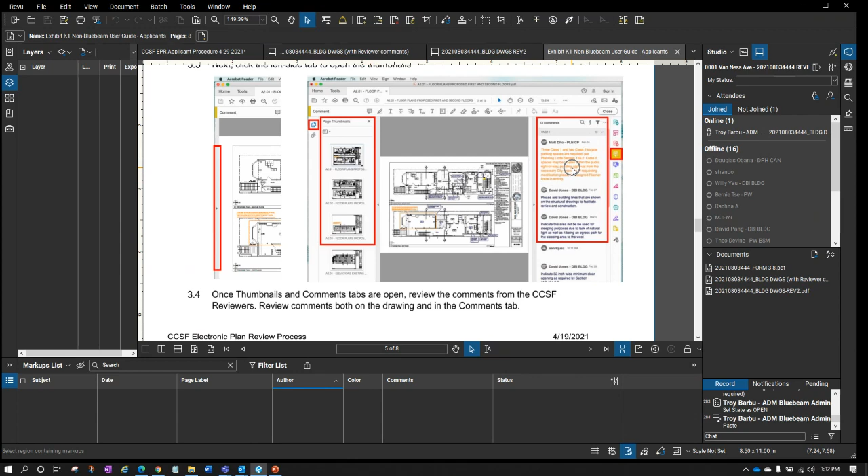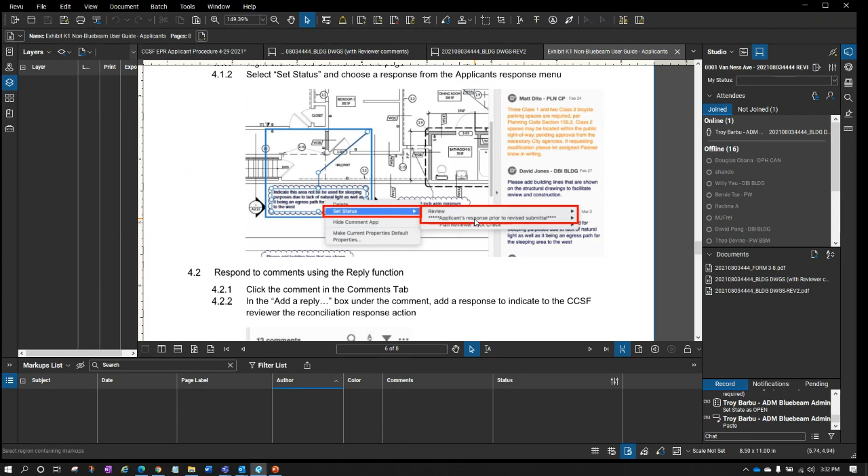Even though you're in this Adobe Acrobat Reader environment, you still have the ability to look at your thumbnails, look at the comments, set your status using the status button down here, respond to those reviewer comments, and add a reply as well.

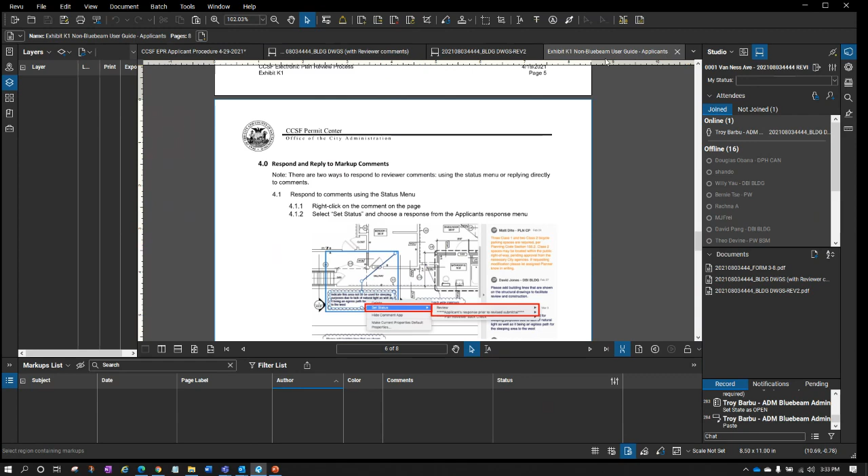All of this is covered in this document, and like all the other procedures, it covers step by step exactly how to go through this process, how to find the different locations for where to respond, where to set the status. It's all covered here in that non-Bluebeam user guide.

Just note that our ultimate goal is to be working as much in Bluebeam as we can, but we understand that in some cases users won't have that opportunity, and we want to be accommodating for those users.

I'll come back one last time because I think this is important enough to stress a second time. One of the first things you may want to do is get this document, then look at the version of Bluebeam you have, and what part of this document is applicable specifically to the paid version, what requires Bluebeam Studio Extreme, and what parts will work with the free version. Doesn't matter if it's an old or new version, it makes no difference.

That information is down at the end of this document for you, and I think that should be your starting point as you start to look at coming up to review, understanding what version of Revu you have. So I think that covers everything.

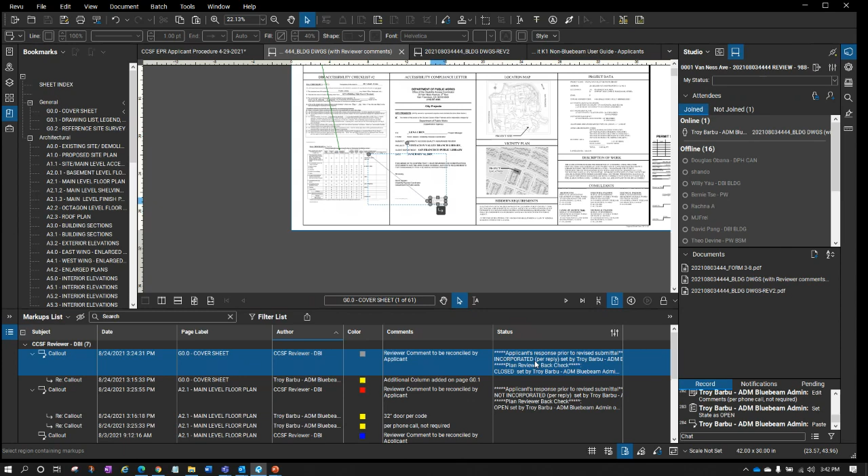What I would say is you're trying to communicate as efficiently as possible back to the reviewer exactly what you've done. So adding things like 'incorporated,' little replies, little notes that indicate specifically where the incorporation has happened, where the subsequent review has changed, and then finally clouding, adding a cloud around that subsequent submittal that indicates where the changes have happened. That is all still required, but it's not really a workflow change from the earlier processes of paper or anything else. So if there was a workflow process set a certain way, I don't believe that has changed.

The next question, Troy, is should the last page be labeled? Great question. It's not important that the last page is labeled. You can see here, if I look in the bookmarks, I don't know if anyone picked it up when I was inserting the page. I would need to get out of here.

It creates a label automatically. Let's just really quickly—it's going to be difficult for me to go back that far, unfortunately. Let me try one more time, insert. But the answer is no, it's not required.

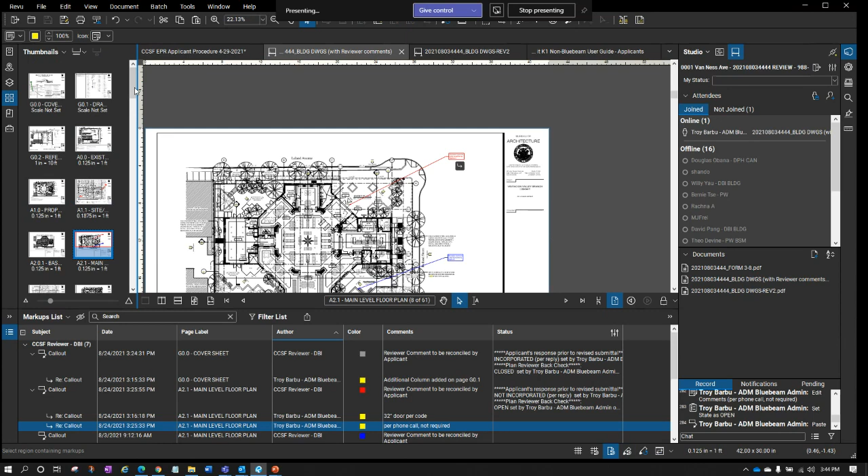No comment should ever be added to that page. The really big purpose of why we add labels into the thumbnails—why these page labels are here—is because when a reviewer makes a comment, you know what page that comment is on. So really it benefits you, the applicants, even more than it benefits the reviewers.

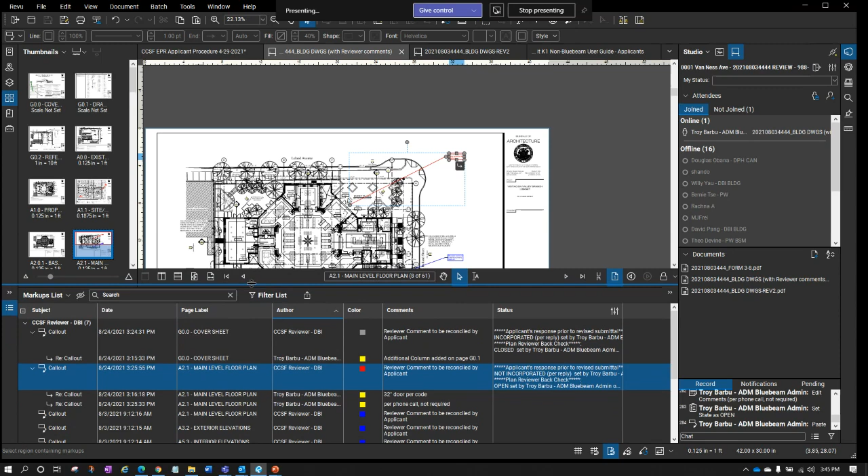Let's say you're subbing out your comments to a bunch of different trades. You'll be able to see very quickly when comments are made what trades are involved, because it doesn't say the comment was made on page 52—it says the comment was made on page A2 or G0 or S1 or M1. So having the page labels in place really helps, because when comments are made, you can see exactly what page those comments apply to, not just page 12 or something like that.

Okay, other questions? This one I'm just going to read out: Hello, I'm trying to understand how submission of my specific building permit application works under the new process, specifically for energy storage systems in San Francisco above 200 kilowatts. I submit OTC with plans permits to SFDBI. I go through electrical, building, non-structural, and fire counters. Fire does not approve the plans OTC and only does intake. In this case, would the whole building permit application go through all counters via Bluebeam, or would it be in-person OTC then submitted to fire through Bluebeam?

So we are not doing a bifurcated digital and paper process. But this particular type, Francis, I need to confirm. I believe it would start via the email process that Troy is showing us right now, and the DBI permit techs would route it accordingly. But I will confirm and follow up to your email inquiry so that you know for certain. Again, I believe this one goes through the standard full EPR process now.

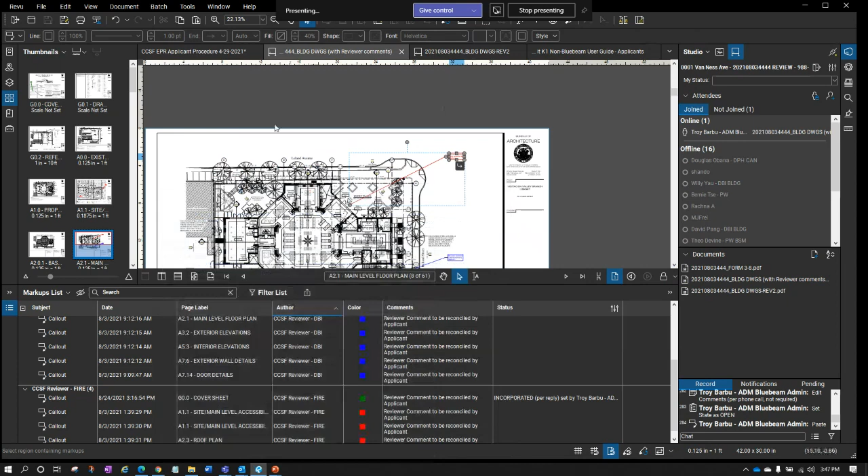Well, not much is that different, but just note here in the procedure, if I come to the naming convention here, if I can find it, it kind of covers one thing. Sorry, let me come back to it, it covers the naming process as part of the appendix. So in the appendix, when we're talking about some of the items, it differentiates the addenda as far as the naming.

And then other than that, if you refer to sf.gov, I believe it has addenda information in here as well, submit addenda for your site permit. But other than that, really the reality is you're coming to this place inside of sf.gov as opposed to the regular submission for a DBI. You're not coming to a building permit application, you're coming to this location.

And really, when you go in here, following the rules to create the PDF set, that's exactly what I showed you. Adding the backcheck page, that's exactly what I showed you. It does get a little bit different because you're submitting addenda information just a little bit differently, but other than that, your submission process, your review process is going to be really, really similar. I can't think of any really substantial areas where it's going to be completely different. But just follow along with the information that's provided here in sf.gov for submitting the addenda, and I think you should be in good shape.

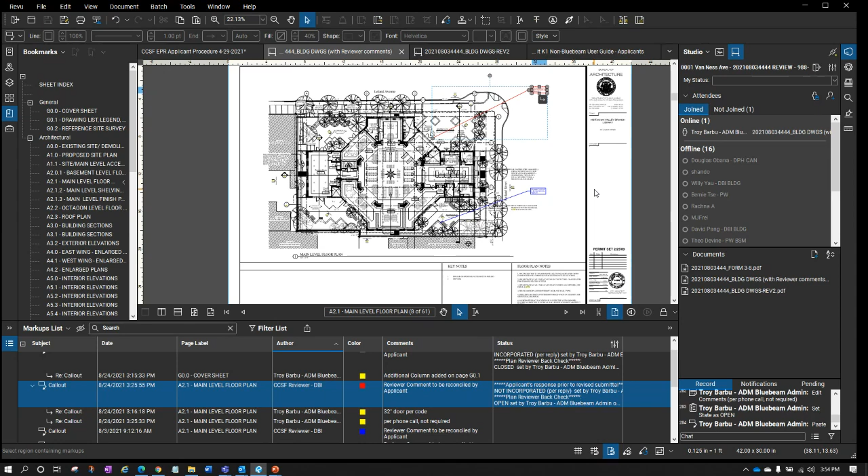It's going to cause a lot of issues, especially when you're making PDFs out of those. It's going to make it difficult for OCR to read. It's going to cause all of the different little markups that appear. That's all a result of using shape fonts, SHX fonts, inside of AutoCAD. So if your fonts are changing, one of the first things I would look at is making sure that when you're in AutoCAD or even in Revit, that you're using a true type font. If not, use a common true type font, such as Helvetica or Arial. If you're using anything other than that, you're going to probably be anticipating some issues with fonts going down the road, especially when we're looking at creating a really clean PDF formatted set. So true type fonts, that's the way to go.

So those should be on paper. The addenda process is really, and I think this is on the website, if you've started digitally, the addenda process is there for you digitally. But if you have been working on paper, the DBI is asking that you remain on paper. And again, it's a case-by-case basis. So if this is an issue for you, please reach out to the Permit Center email that you sent this question to, and we will work with DBI and review the process again.